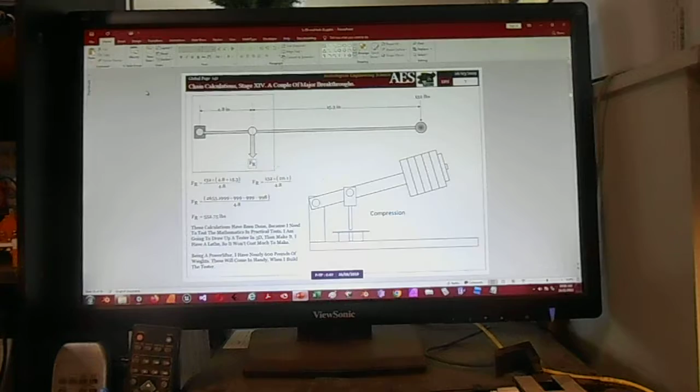The reason I've come full circle to this is because I'm doing stress tests on the gears of this transmission I was designing, and I now find myself at bending moment because I've got to make a cutter to cut the gears.

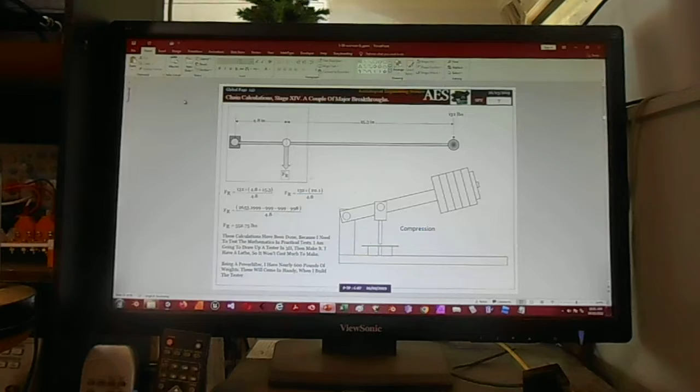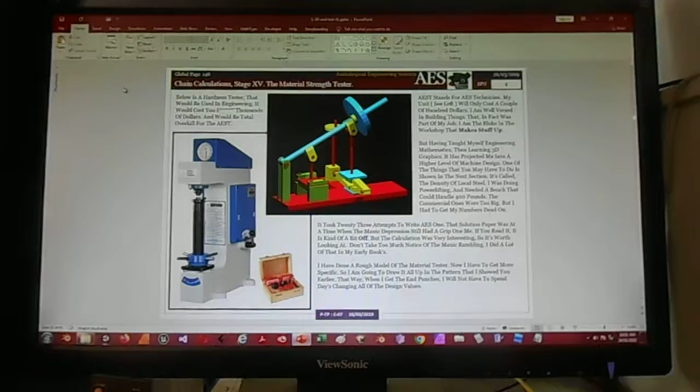This comes down to what this thing was originally. That originally was this design, this idea, and this was for cutting really thick plate, like quarter inch thick plate, and that was this design here, that one there. I can actually achieve that using a lot of leverage, but I need to do stress calculations.

This is where the test piece that I tested for this is the density of local steel, didn't have a hole in it. I couldn't find the actual plate at the time, so I used a similar one, but that test plate didn't have the hole in it, and I had it machine cut very square, and I measured it up and did mensuration on it, and calculated the density of it, of the local steel.

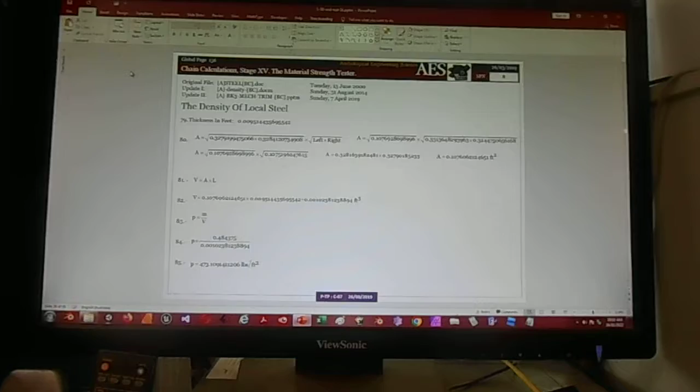I think they quote the density of steel as 490 pounds per cubic foot. This was 473.109 - it was dead on, very accurate. It's real handy, because that number is a general term. It doesn't necessarily relate to the stuff that you buy over the counter here. But then again, they buy it different every time - every time you buy new stuff now, they buy it from different places.

So before I start doing anything in steel design again, I'll retest that value for the density of steel and make sure I buy the same stuff.

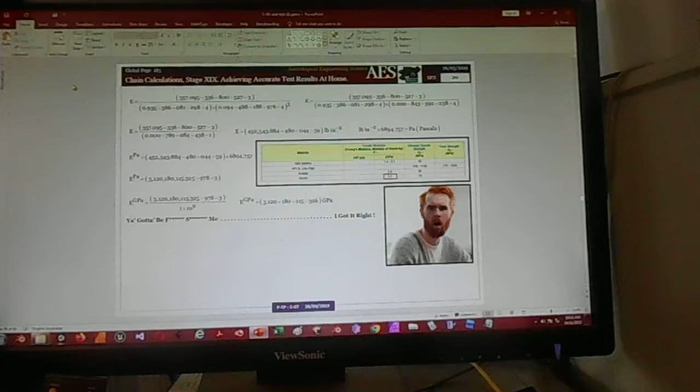Where I am now is testing - this is for testing Young's modulus. And what I did to start with was, the first thing I needed to do was actually determine what the value of Young's modulus was, because they give you 50 million values and they don't give you the right ones. So this one, it turns out, is the right chart.

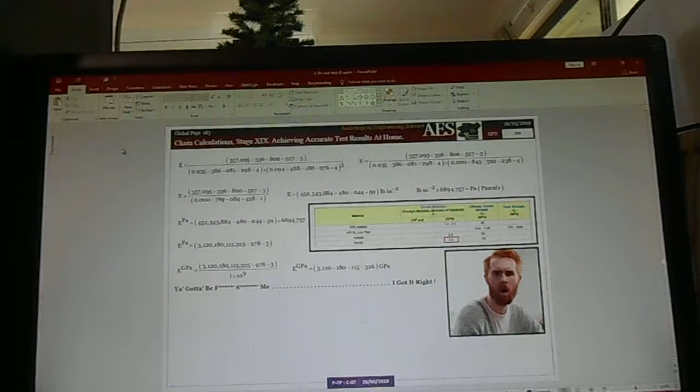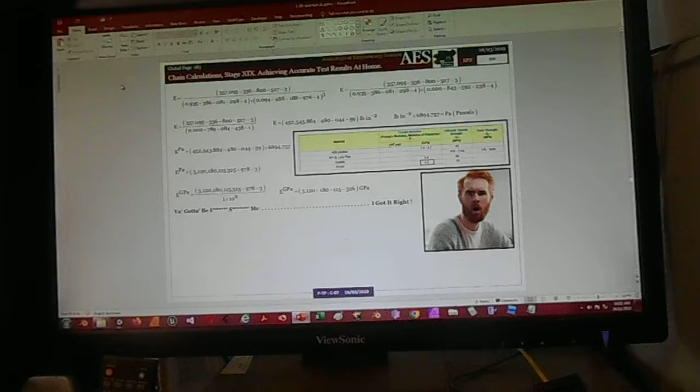That particular one quotes 3.2, and I calculated it out at 3.12, which is bloody unreal - very accurate, quite good. It's quite possible it could actually be the modulus of elasticity of that particular component. Those values, I think they give you generalised values. This is the modulus of elasticity of the material itself - this was of the acrylic that I tested.

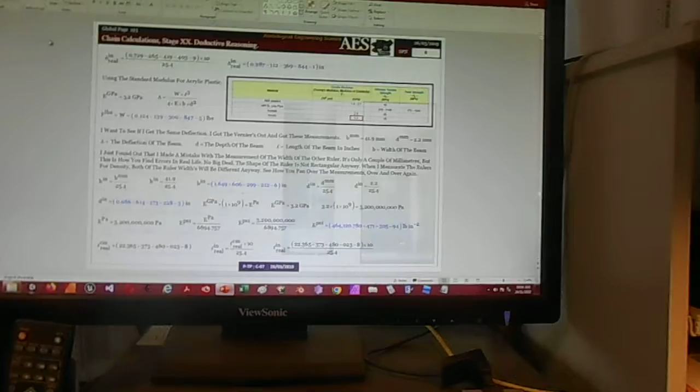And then I did other tests to verify all of this, checked it and double checked it. And this is the tester that I've got here now. This has now progressed.

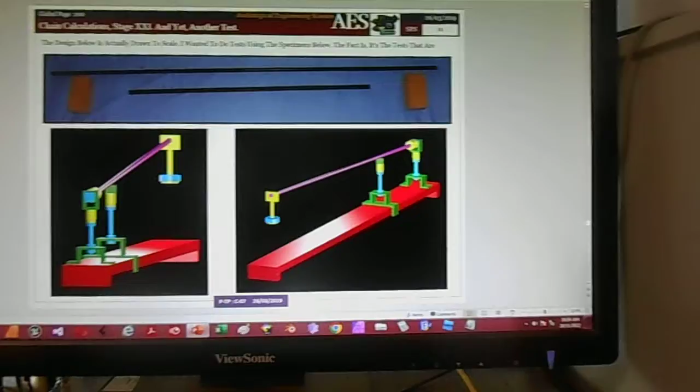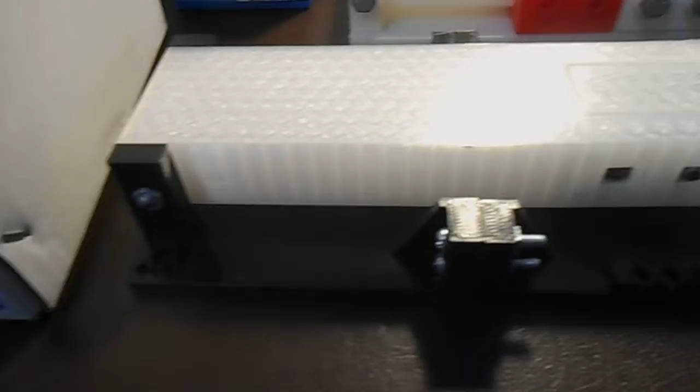I started with that on the 3D design. I made it out of wood - that was rubbish. I progressed to this design, and I've now progressed to this one here, which is absolutely killer. It's nice and long, it's strong, it's very rigid. That's recessed in there, those things in there, it slots in. This is very strong, it's extendable, as you can see.

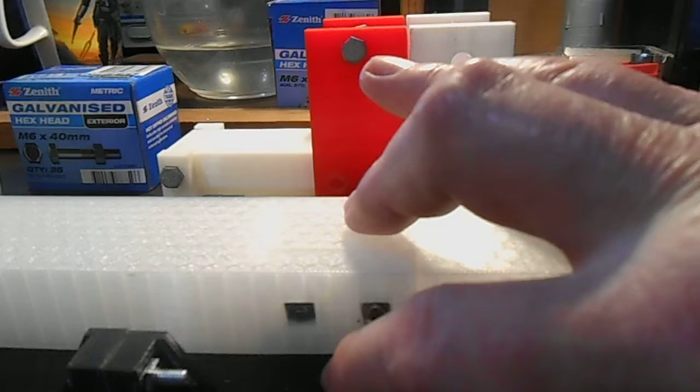So it's in modules, and you can make that longer and longer. There's a few things I have to do to make this good. I may have to slide a shim sheet under here to make that nice and strong when I'm testing material, so it doesn't move. But this is looking really good.

Bunnings in Horsham, to start with, they were difficult. They weren't very helpful. Now they're realising, they found out who I am, and they're starting to be a little bit nicer to me. And I got some advice - I don't believe it. They've been pretty good the last, I don't know how long, months, I've been going back in there, and instead of giving me a hard time, they're actually cooperating.

Yeah, they're not happy about it, but they're doing it. And the great thing is I've got some advice, but time will tell if they gave me good advice, because I bought one gun off them for $400 and I said I want to buy a gun that I can buy in 10 years time. They sold me one and they're out of business. You know, these people lie out here, they're bastards. They sold me - I bought an $800 photocopier, again, going out of business.

And I reckon this is probably what the case is with this too - probably Ryobi's going arse up. If not, then they gave me good advice. But if I find that Ryobi have gone arse up, I'm going to be very, very angry. I just spent $400 on this. I'll be really angry if they're in trouble. This is the sort of thing they do out here. Yeah, so I'll have to find out about that.

Other things that I've made advancements with - this is my nut and bolt stock. I spent well over $100 on that. I've got to have nuts and bolts for design purposes. And the great part I've found out about this now, it's not the nuts and bolts that you need the part numbers on. What I'm doing now is buying bulk, and the great thing about farmers - this is owned by Wesfarmers apparently.

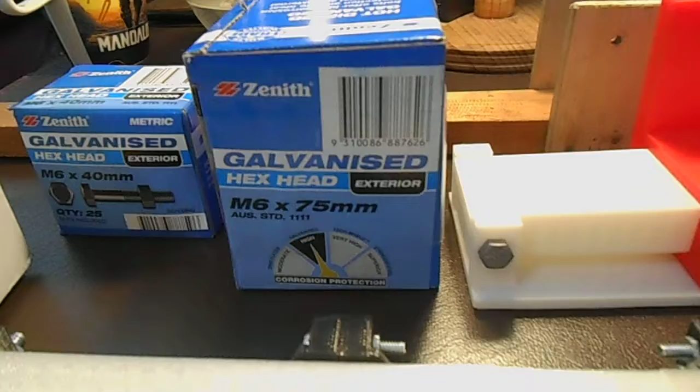Bunnings - so they're farmers, and farmers are hands-on, they really build machines. So when you buy bolts, instead of selling to you in lots of 500, you can buy them in 25s. So I needed this size bolt, whereas roughly these ones here, roughly, right? And I got a box of 25s, and these were quite reasonably priced. So yeah, I'm making a lot of advancements now.

I've got myself a new broom. That was $1.50 - I don't believe it, and that's a really good broom too, nice and soft. So yeah, Bunnings are coming around, they're starting to be cooperative.

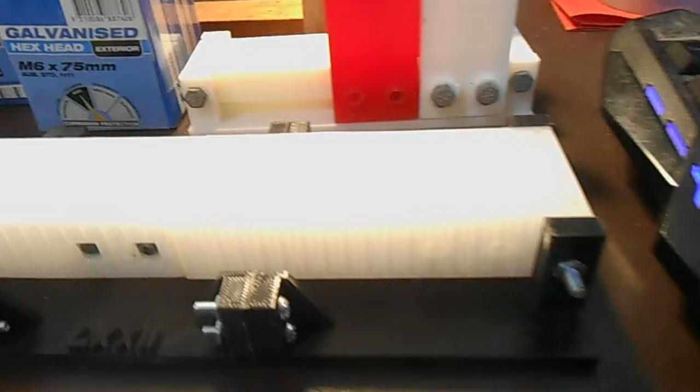Oh, that's the program that I wrote, which I just found. I better knock off, I'm about to get cut off. But anyway, so I'm back to the strength testing again with Young's Modulus. Clive Rocksinger, over and out.